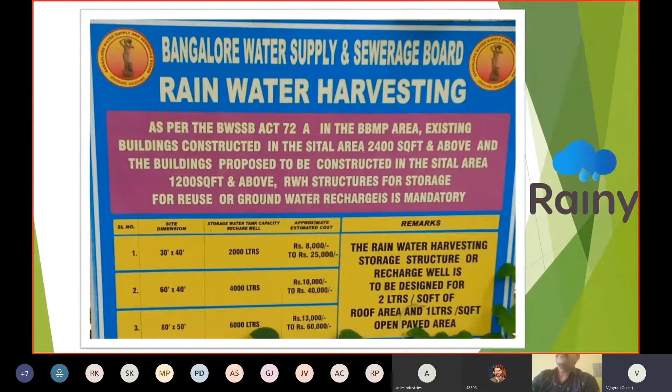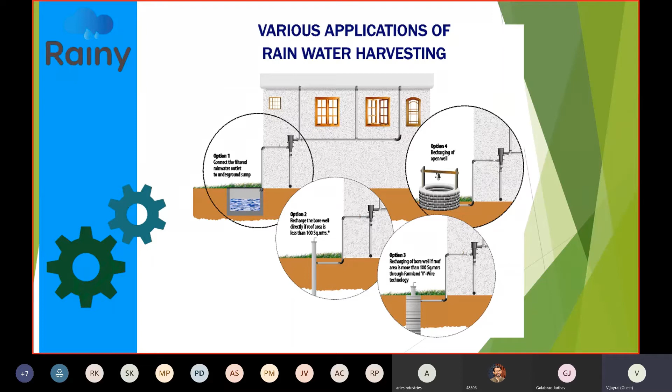So you must be wondering, if that is such a simple and wonderful thing, why is it that everybody has not adopted rainwater harvesting? Why is it that people have not gone for it? With so much shortage of water, every year we are crying for water in the summer, but still people have not adopted rainwater, so that we could have saved the water, or percolated the water into the earth and brought the groundwater table up. This is because of the faulty filters that are available in the market.

If you see the conventional filters, we just make sand and charcoal beds, and we allow the water. Here what happens is, whenever it rains, all the dust debris will come and accumulate at the top, and if you are not able to remove this dust debris, it will start getting decayed, and in the next rainfall this decayed water gets into the tank. That is the reason we always hear, sir, if I store rainwater, it starts stinking. If I store the rainwater, small worms will develop in a few days. Friends, this is not because of the rainwater. This is because of the faulty filters.

Rainwater, if it is stored after filtration in a tank, and if you don't allow air and light to pass into it, you can store the rainwater for 100 years without getting contaminated. There are houses found in Jaisalmer wherein they use only rainwater, the water which was stored under their kitchens. Generally they call them tankas, wherein whenever it rains they collect the water from the roof and store it in the tanks, which can be used year long.

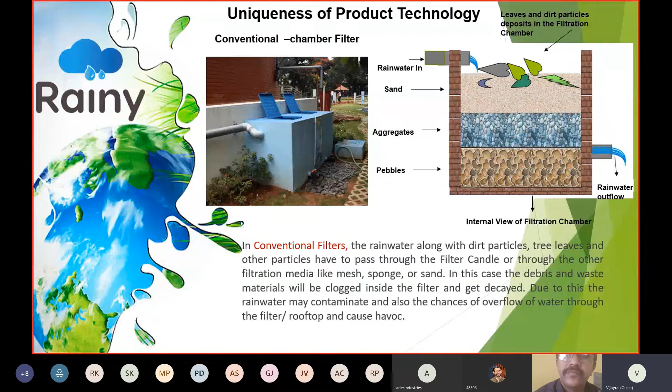In the market, you would have seen there are many filters available, but all of them have a ball valve at the bottom. The only problem, as I mentioned earlier, is because of these faulty filters, rainwater harvesting has not become very popular, even though it has so many benefits for mother earth, for the country, and for the person doing it.

Because of this, whenever it rains, all the dust and debris comes into these filters and accumulates. After every rainfall, you have to open the ball valve to remove the dust. If you don't do it within 45 minutes of the rainfall, all that dust and leaves start decaying. That's why this has become a compulsory effort, and who is going to do it after every rainfall?

Many times it rains in the middle of the night, and nobody is going to go and open these ball valves. So after a study of 5 years, we invented a first-of-its-kind filter called Rainy.

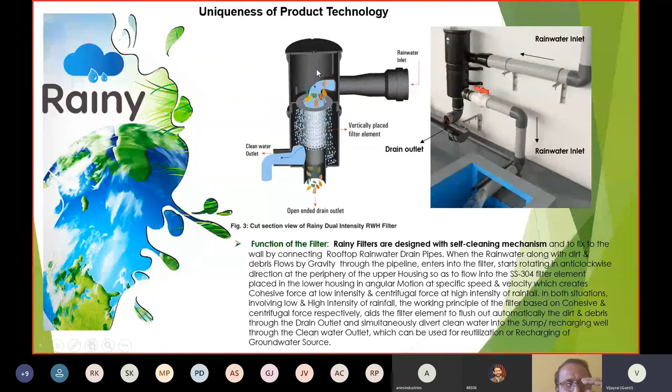So let's assume this filter gets choked up, all the water will still flow as it is now, but it will not cause any damage to the pipes or your rooftop.

So these filters are fitted to the clean water outlet. What we do is interconnect all these downtake pipes. One thing you have to note is, when interconnecting these pipes, you have to ensure proper clamping is provided.

When the pipe is running vertical, if you just provide a C clamp, it is more than enough. But when the pipe is running horizontally, the load of the pipe plus the load of the water is on this clamping system, so if you don't provide a proper clamping system, the whole horizontal pipe can come off.

We have seen one of the major reasons for failure of rooftop rainwater harvesting is bad plumbing. Unless you provide a proper L-clamp at every 1 meter distance with proper clamping done, there are chances that these pipes come off.

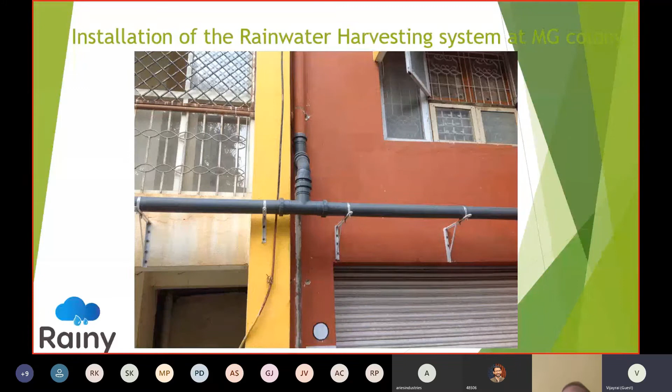I have seen plumbing systems using just C clamps, but now there are a lot of good clamping systems available. I would request you to use a very good clamping system and give proper support with a proper gradient - minimum 1 foot of gradient for every 50 feet, or 1 meter of gradient for every 100 meters. If a proper gradient is given, it can become a foolproof system, good for even 50 to 100 years.

You can see here how beautifully it is done. For every 1 meter, there is beautiful, specialized clamping done.

Then this water is let into the filter, and the clean water is let into the sump. You can see the wastewater pipe here. This is open-ended. You can observe there is no ball valve here.

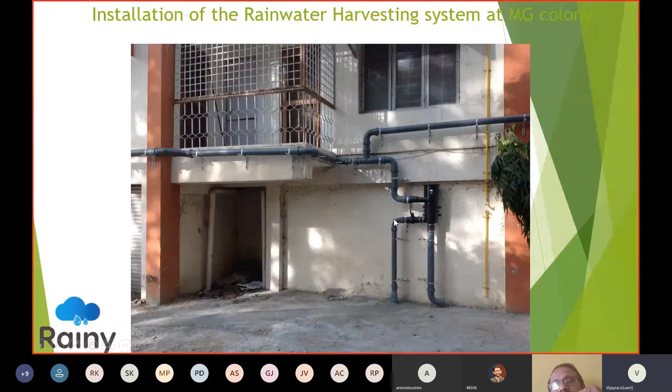So whenever it rains, all the water comes here and gets filtered through this filter. The dust, debris, leaves and all go out automatically, and the clean water comes through the clean water outlet and goes to the tank, and overflow from the tank is let into the borewell.

The pipe you are seeing is a specialized HDPE pipe, used for the longevity of the pipe's life. Second, these are coupler joint pipes, which you can see here. These are special pipes we have developed for rainwater harvesting systems, which can be very easily adopted. They are lightweight, weighing as much as a PVC pipe, but with a life of 40 years, at least 20 to 30 years more than PVC pipes.

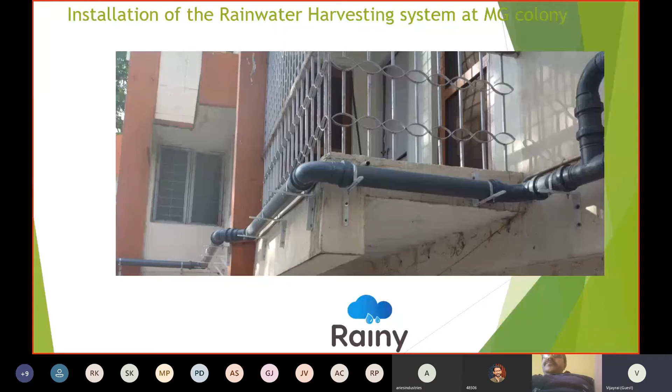You can see how beautifully it has been installed, with the proper gradient in place.

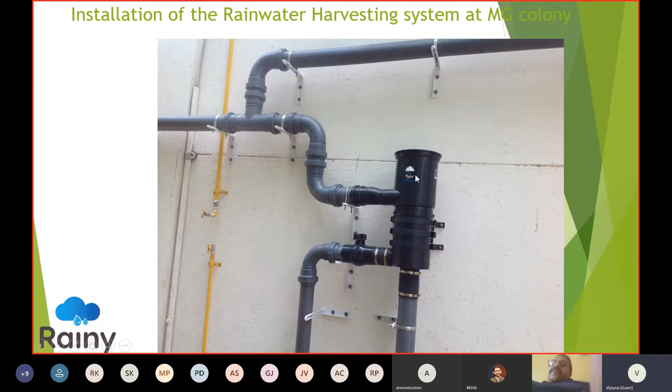This is a close-up of the installed filter. This is the rainwater inlet, this is the clean water outlet, and this is the wastewater outlet. This filter comes with all the fitments required, like a wall mounting bracket which is hot dip galvanized and powder coated, rubber boots, and wall anchor bolts. It comes as a total set.

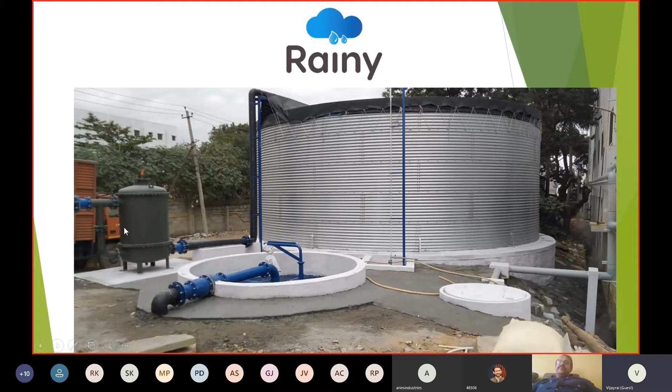All the water from the rooftop, which covers a huge area, is let into this jack well system. From this jack well system, the water is pumped into the filter and then into the tank, where it is stored. So if you have less space and want to store water at a cheaper cost, this is a very good option you can utilize.

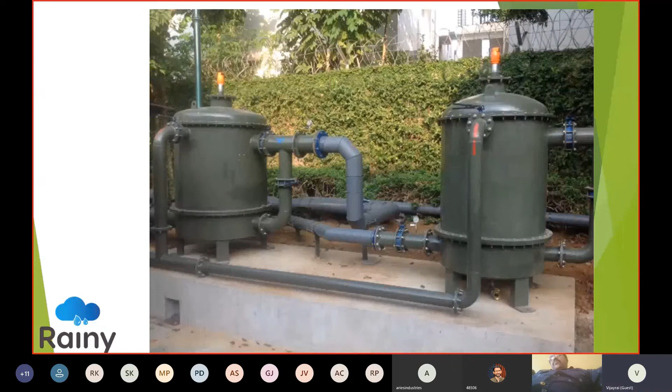These are the filters I was talking about earlier, the low pressure silica sand activated carbon filters. These filters come with a backwash facility, so they can be backwashed and provide trouble-free usage for a very long time. When you have a huge rooftop area, parallel filters can be installed.

Here you can see our FL500 model. We have about 4 models according to roof areas: FL100, FL200, FL300, and FL500. FL100 can cater to about 1,500 square feet, FL200 for 2,500, FL300 for 3,500, and FL500 for 5,000 square feet of roof area.

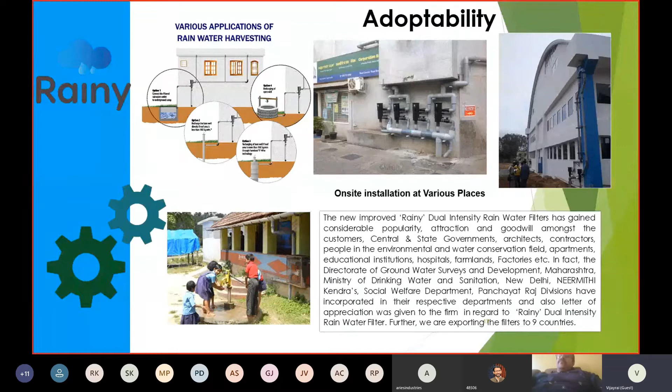They're using only rainwater. With just 1,000 mm of rainfall in Bangalore, you can Google and see there are thousands of houses in Bangalore which are using only rainwater. They don't have municipal connections, they don't have borewells. They've made a tank according to their usage, calculated so they can store the last rainfall for their summer usage. According to their calculation, they have built the tank so they are self-sufficient in rainwater, sustaining for the whole year by adopting a simple rainwater harvesting system.

Retrofit can be done. We don't require rocket science to have a rainwater harvesting system. For a house of about 1,200 square feet, it will cost hardly about 15 to 18,000 rupees, including filter, pipeline, installation, and you can have the benefit for lifelong. Even if you take the return on investment, it is hardly about 3 years of time for the amount you spend on tanker water.

So the government is encouraging rainwater harvesting because it is beneficial for the person having it - he is saving on his water bill, saving on his power bill, and recharging the groundwater table. So it is a win-win situation for everybody. It is good for the government and country too, because if there is no flooding, the roads will not get destroyed. If the water is percolating into the ground, the water table will come up, so we are leaving water for future generations.

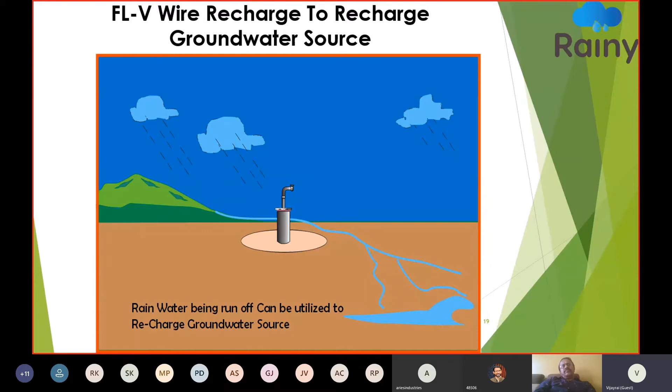There are 2 methodologies to recharge the borewell. One is if you are having roof water, you adopt the same system used for reusing water, and this roof water can be let into the borewell directly. But if it is only surface water, we cannot let this water into the borewell directly, because we don't know the quality of water coming from the surface. So for that we have developed an innovative system called the Farmland V-wire injection well technology.

In this V-wire injection well technology: generally, if you see all over the country, they say to recharge the water into the ground, make a pit and fill the pit with gravel, brick bats and all, and then leave the water there. But if you see what happens is, in the majority of the places, the topsoil is clay mixed soil, and then we have got sheet rock.

So just making a pit and leaving the water will not percolate because of this clay, the overburden which is not allowing the water to percolate, and then the sheet rock will never allow the water to percolate. The best example to tell how this recharging pit will not work is, you must have seen a lot of lakes around. And these lakes will have 365 days water availability, and they have a depth of more than 20 to 30 feet.

So if our recharging pits would have worked and groundwater would have been rejuvenated, if we had dug a borewell next to the lake, we should have got 5 inches of water, right? Because there is water 365 days, and if it is percolating as everybody claims, we should have got 5 inches of water in the borewells dug next to the lakes. But that is not the case, because many of the borewells which are dug very next to the lakes have failed. That really means to say that water doesn't percolate if you are making just a pit.

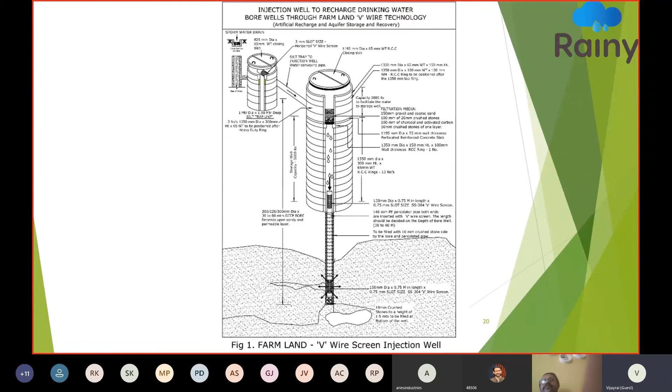Then we use about 5 inches of zigzag perforated pipe, and we use this V-wire screen. This V-wire screen is a special component. Here you can see this V-wire screen. This is made of SS304 stainless steel strainer. Externally they are flat, but internally you can see here on the right hand side they are V-shaped. That is why these are called V-wire screens. Because of its wide opening, continuous slots and the specific design, it gives a continuous slot opening so that a lot of water can enter into this V-wire screen and go into the deeper aquifer. And because of this V-shape, these slots are non-clogging.

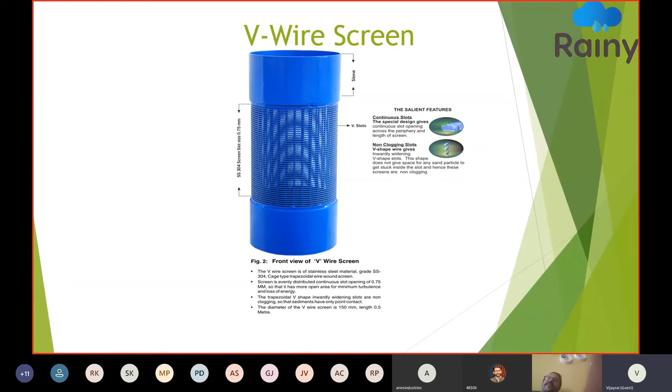These are fixed here. You can see here now. So once we insert this pipe, at the bottom we insert one V-wire screen, and then the zigzag perforated 5 inch pipe is inserted till the top. Once this is inserted, because we drilled 8.5 inches and inserted only a 5 inch pipe, the gap between the pipe and the drilling is filled with 10 mm pebble stone, so that silt should not enter, only the water should come in or go out.

Once this is done, we dig a well surrounding this drilled pipe, about 20 feet deep. Once this is dug, after about 17 feet, we start inserting reinforced concrete rings one above the other. You can see here, we insert reinforced concrete rings and make a well surrounding this drilled pipe. After the 17 rings of 1 foot height have been installed, we put a perforated slab. Before putting the perforated slab, at the bottom of this well, we cut the pipe and insert one more V-wire screen.

So this is the entry point for the rainwater which we are allowing to come into the well. We insert this one V-wire screen at the top, and the end cap is installed to this. Once this is done, after the 17th ring, we put one zigzag perforated slab. On this perforated slab, we put filtration media: first 40 mm crushed stone, then 20 mm crushed stone, then wood charcoal, then activated carbon, then 10 mm crushed stone, gravel sand and fine sand. This is a fortified filtration media, and this is connected to a silt trap.

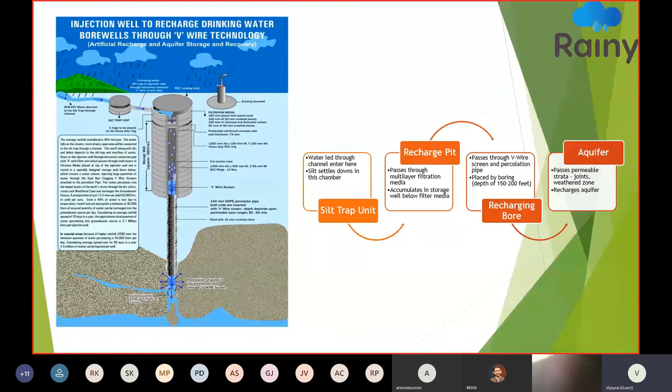We have installed more than 14,700 such installations throughout the country, and we have seen that even dried borewells which were giving water earlier have been rejuvenated. Lots of experiments and third-party inspections have been done. It has got a huge success rate. Even a team from Times of India came and visited, and they awarded us a 5 lakh rupees cash prize and the Earthcare award when the team of 12 members visited Chamarajanagar district, where we have installed more than 210 such injection wells for recharging drinking water borewells.

So here you can see in this picture, this is our borewell, on the right hand corner. About 15 feet away from this is our main injection well, and this is our silt trap. Without our injection well system, the water would have always gone down because of the gradient; you can see the gradient is towards this car. The whole water would have just gone away.

Instead, because we have created this silt trap and the main injection well here, all the water which would have otherwise gone as runoff is let into the silt trap. From the silt trap, the water is let into the main injection well and it goes to the first permeable zone. Thereby, the quality and quantity of this borewell water is retained. You can enhance the quality of the borewell too, because rainwater is the purest form of water, low TDS without any minerals; once it is filtered and joins the aquifer, because of the dilution effect, the quality of the bore water also improves.

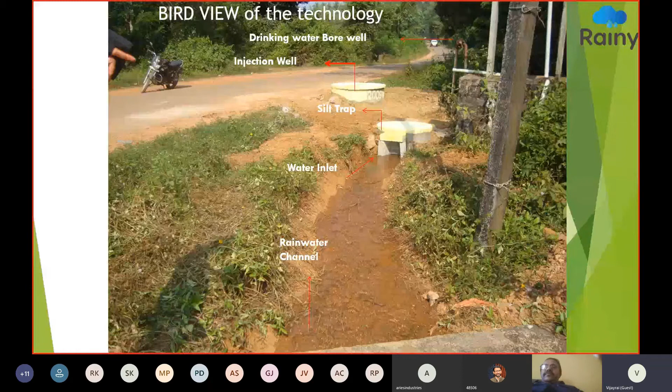We have seen a lot of changes. These are the special kind of rigs which have been developed for this purpose. I can very proudly say that Farmland Rainwater Harvesting System has got 2 rigs in the world which are meant only to recharge. Other rigs are generally meant to remove the water from the earth by drilling boreholes.

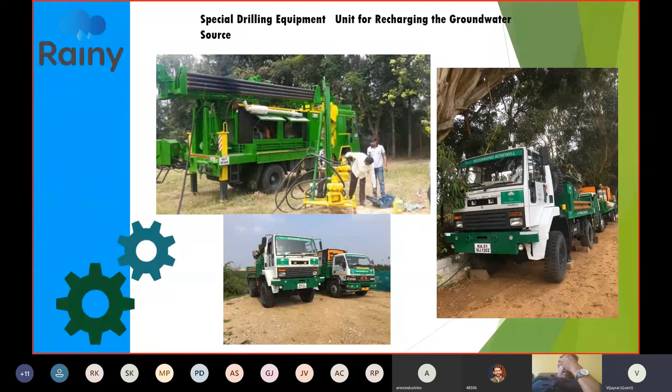But we can proudly say that we have got 2 rigs which are meant only to recharge the ground, and we don't even remove a single drop of the water from the earth. Here you can see a lot of success stories even in the urban and the rural areas.

It can be adopted. All these apartment complexes are adopting it because there are huge surface areas, and they can have the benefit, because from 1 acre of land, with just 25 mm of rainfall, you get about 1 lakh liters of water. With the average annual rainfall of India, we get about 40 lakh liters of water. If you take Bombay's rainfall into account, we get more than 60 lakh liters of water, because the rainfall is more than 1500 mm. So that is the potential of the rainwater.

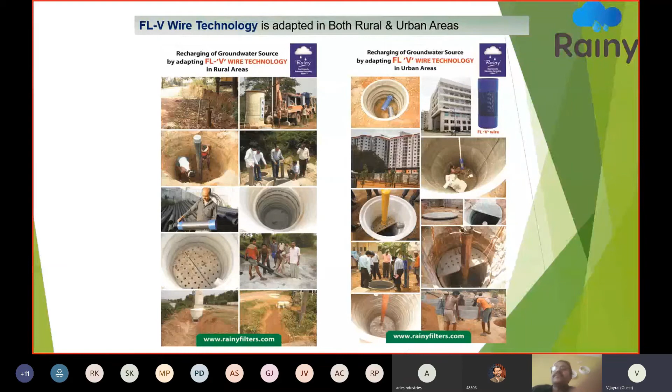Here you can see the various government organizations wherein it has been very successfully implemented. This is one of the very good case studies: we had presented this technology to one IAS officer, a secretary level officer here, Sri Naveen Raj Singh. He said, I don't believe in all this presentation, I'll give you one dried borewell, you have to prove that. He said, I will be personally monitoring this whole process.

So he monitored all the stages of the borewell, and this is on Bettamaraiah, near a village about 80 kilometers from Bangalore, near Tumkur. Bettamaraiah was a farmer whose borewells had dried up, and his sons had moved to the city for work because his borewells had dried up. This borewell was given as an experimental borewell for us, and as you can see on the right hand side, we installed this injection well system, and fortunately there were very good rains for the next 2 seasons.

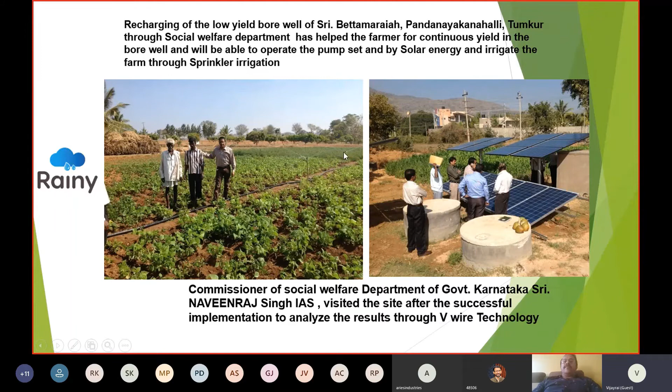His dried borewells got back life. The water which was at more than 300 feet deep, the water table came up. Because the water table came up to a very good height, we could install the solar panels, a solar motor was installed, and we installed the sprinkler irrigation system. Here on the left hand side you can see the picture, only his farm is green and in the rest of the background you can see there are dry farms.

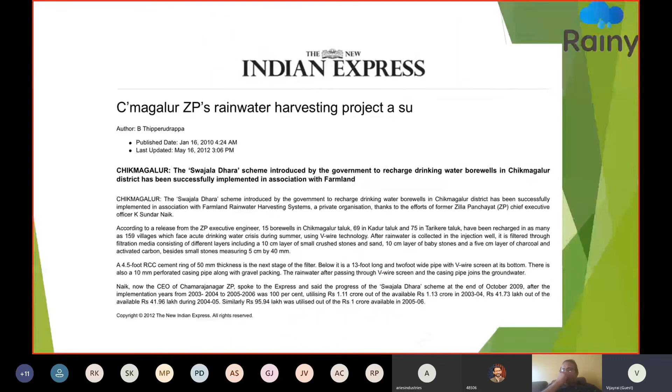Because of these recharging structures, the IAS officer gave the testimonial, because he was the first witness to that. And likewise it has been installed in various government organizations and various villages. It has been very, very successful. These are the testimonials from different newspapers.

And these have been installed in a lot of software companies and the majority of the corporates of the country. Wherever the water used to go out, these were installed to make the campus zero water discharge. They had huge campuses of 300 acres, 400 acres, so a lot of water used to go away from the campus. Because of the installation of many V-wire screens, not even a single drop of the water from their campus goes out today.

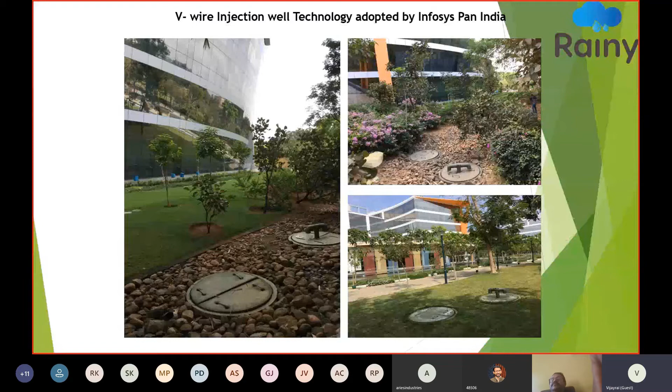Today zero discharge campuses are one of the most required norms of the government. So this can be installed so that all this runoff water can be used to recharge, so that they can get back the water in the summer. Their borewells will get recharged, their open wells can get the water. Here is one more advantage of this V-wire technology.

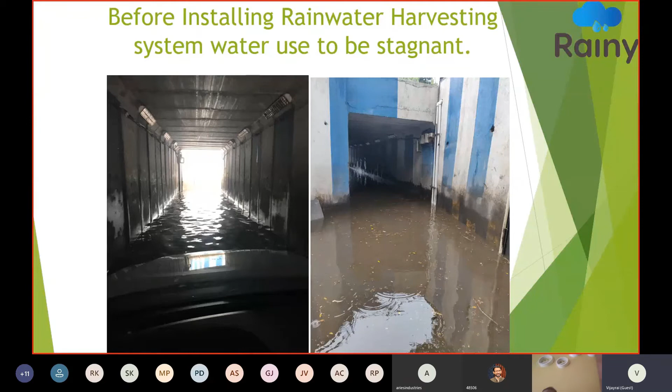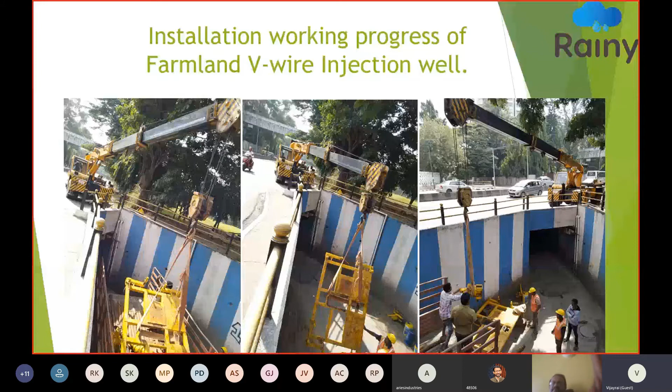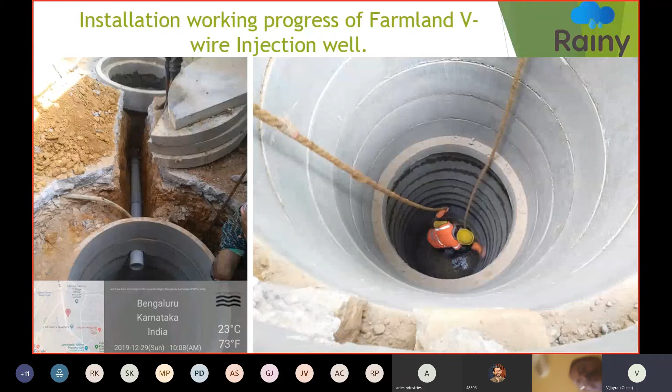So we tried installing a V-wire injection well in these underpasses. You can see the V-wire injection well getting installed in this underpass, and we drilled about 240 feet. This is the first injection well to be installed in an underpass. And this is the construction. You can see here a well has been constructed after the drilling, a silt trap. You can see on the left hand side a silt trap and the main injection well.

And then the recent commissioner of the Bangalore municipality came, and a tanker was brought.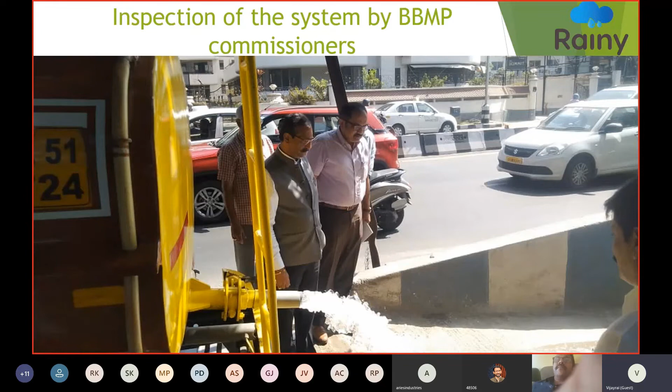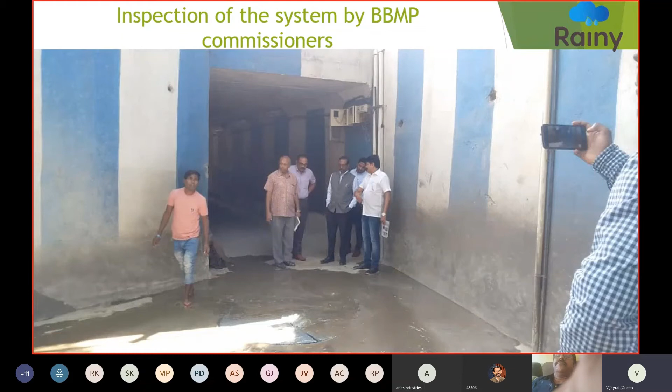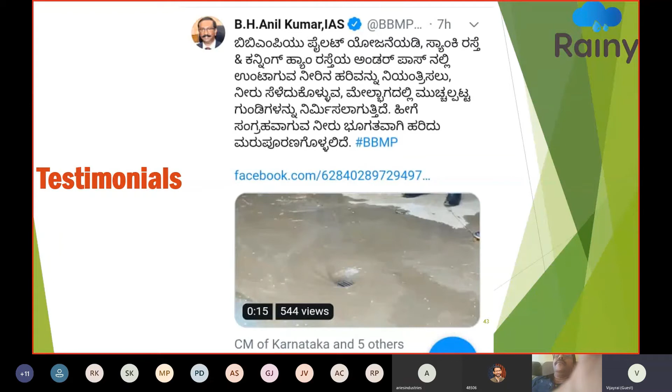And a 10,000 liters tanker in front of him, the water was let out from the tanker, and within 7 minutes, whole of this water, you can see the commissioner being witness to this whole process. Within 7 minutes, 10,000 liters water could percolate. Even in his Twitter handle he had mentioned that, and he has given testimonial how in 7 minutes this whole water got percolated, and this has been adopted in almost all the underpasses of Bangalore now.

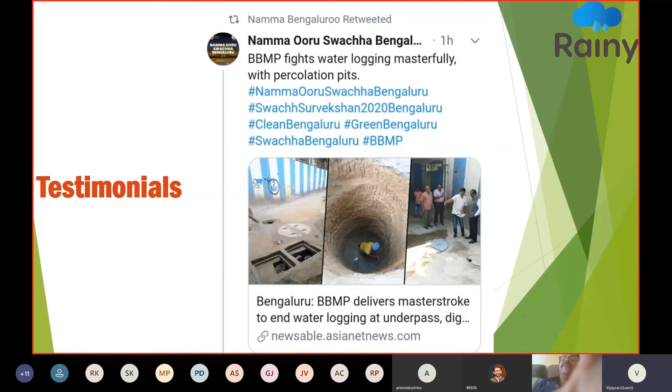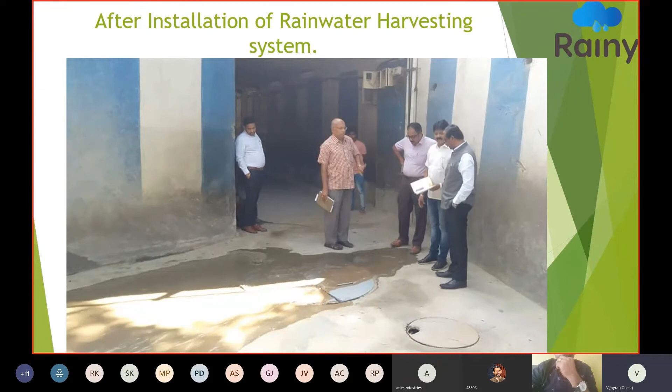Government has given us a work order so that this can be installed in all the underpasses now, so that there should not be any water logging, and it has been working fantastically fine. Whatever pilot project we had done this monsoon, it has been proven with heavy rainfall of more than 100 mm in just 3 hours also. Not even a single drop of water was accumulated in this injection well. You can see this, a silt trap and the main injection well.

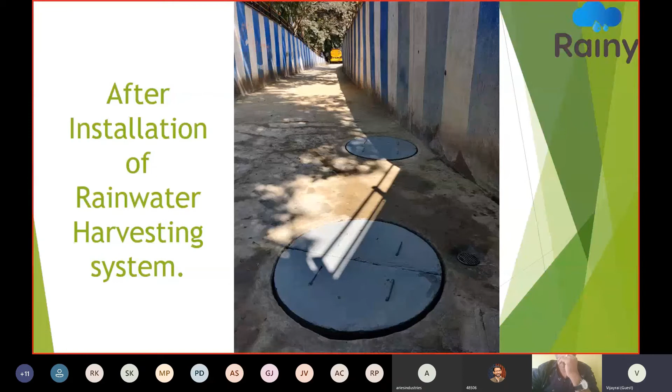I'll just play a small video for you all to understand how the things work in the injection well.

Can you see, sir? Yes, sir.

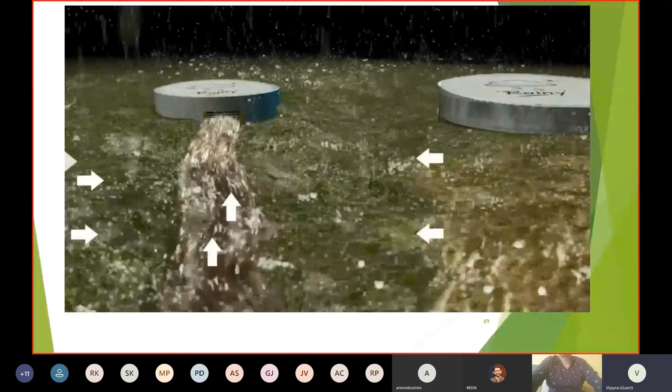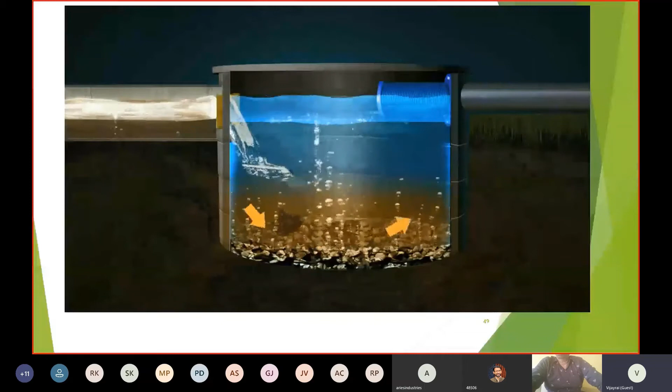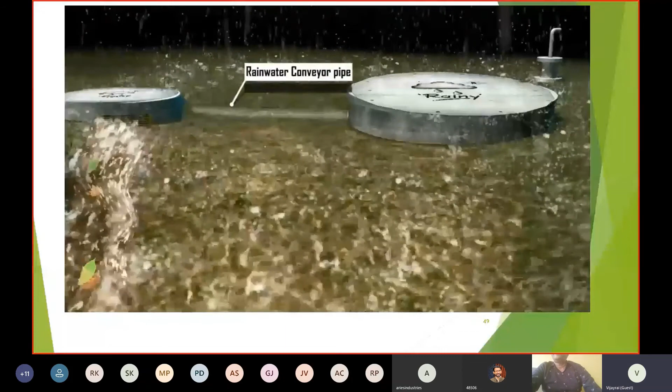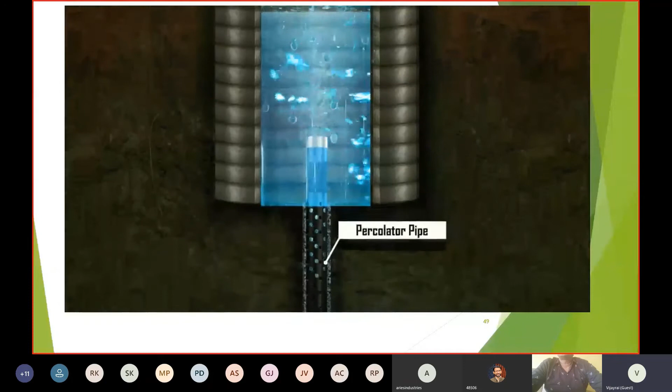The surface runoff is diverted through a water channel to a silt trap. Majority of the silt, leaves, dust and debris settles in the silt trap. And the clean water is led into the injection well, passing through multi-layers of filtration media placed at the top of the injection well. The runoff water is accommodated in a specially designed storage well, which creates a well-defined water column, injecting large quantities of water into the deeper layers of the semi-impervious soil strata through the non-clogging V-wire screens attached to the specifically designed percolator pipe, placed to a depth of 30 meters below the ground.

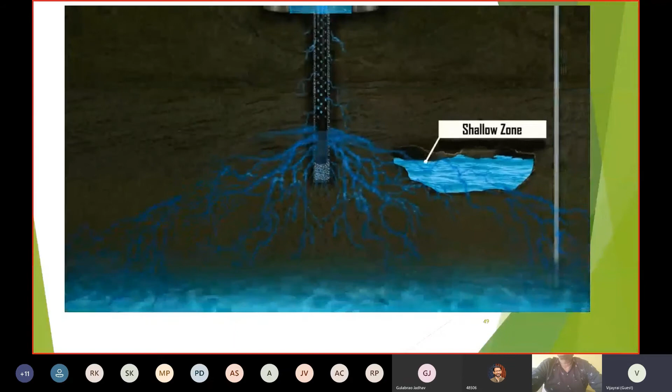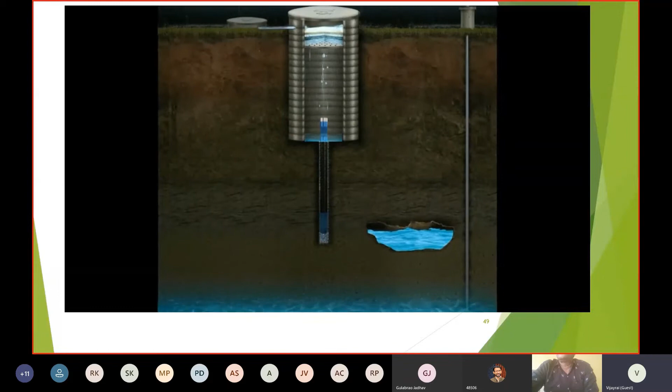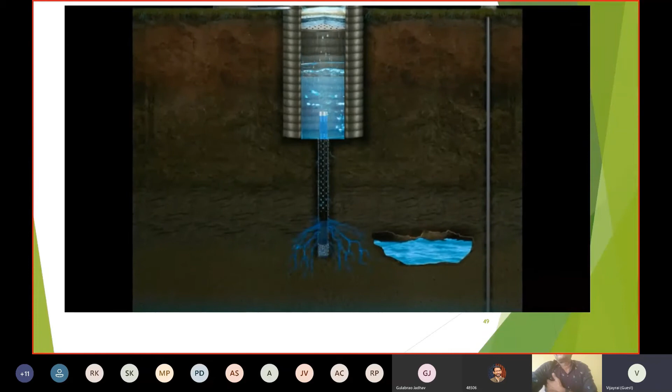The water column and the dual V-wire screen facilitate the filtered rainwater to reach weathered and permeable zone. Thereafter, it becomes easy for the water to percolate into the deeper layer of the earth strata by capillary action through dry joints and cracks. Farmland Rainwater Harvesting Systems has developed this unique V-wire injection well technology to recharge and replenish the groundwater source. This technology has found wide acceptance both in public and private sectors because of its quick success rate to replenish the dried and depleting bore wells.

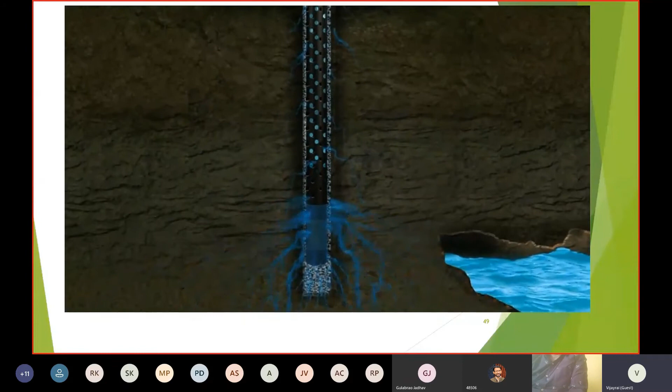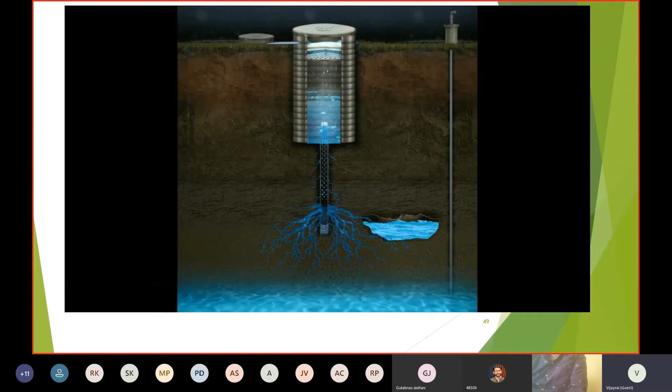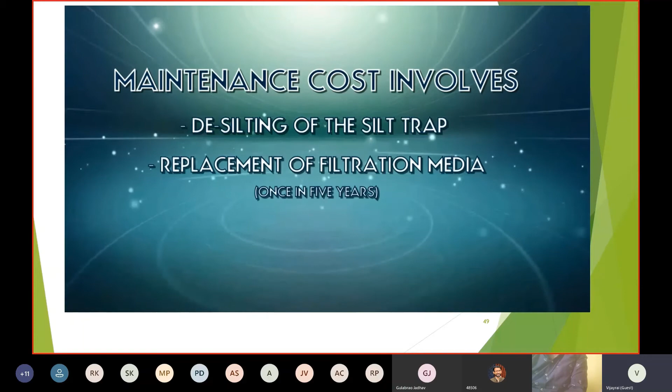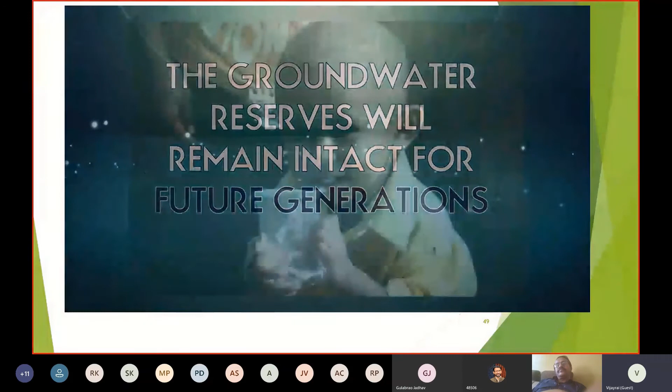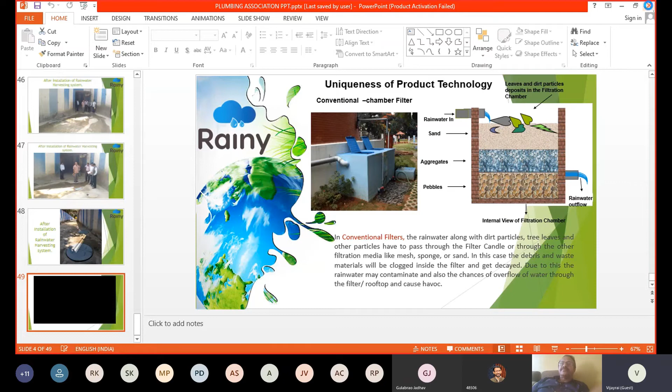So if at all we are able to install this rainwater harvesting system, and in the larger areas the surface water injection well system, we can change the scenario from a water starved country to a water surplus country. It will not be very difficult for us to change the whole scenario with the amount of rainfall we get, if we can properly utilize it. If we use all the roof area, we just need installation. If we properly install and fit it, then we can 100% convert our whole country into a water surplus country.

So I just request you all to please join hands so that we can turn this water stressed country into a water surplus country. The government is making all the efforts. You must have seen recently that the Jal Shakti Minister is putting up a lot of efforts to bring rooftop rainwater harvesting as well as groundwater recharging and making it mandatory everywhere.